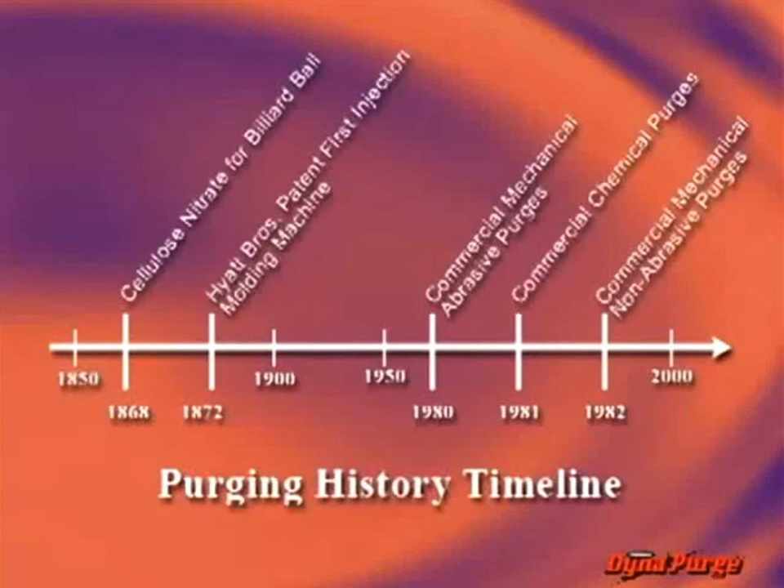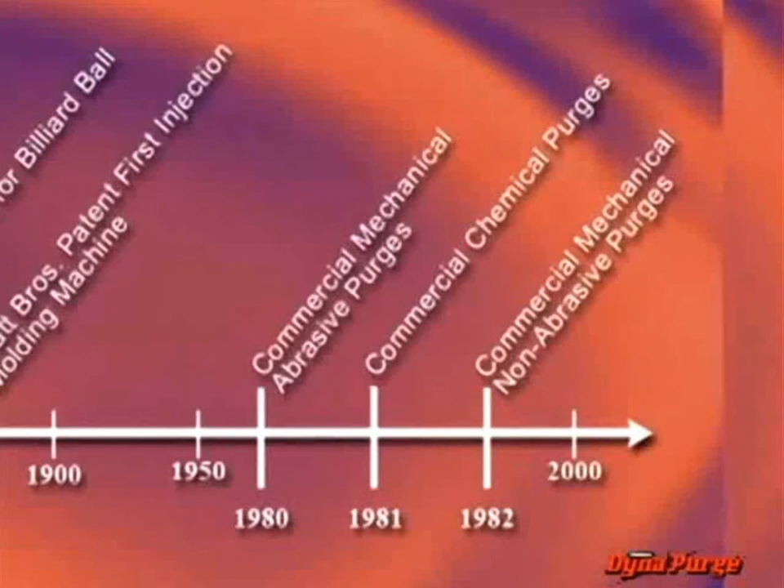Back in the early 1980s, Dyna-Purge, along with another company, pioneered the use of commercial purging products. Since then, over 100 companies have entered the market supplying mechanical, chemical, or hybrid commercial purging products.

To better understand the size and scope of the market, a few years ago, Plastics News commissioned a study asking plastic processors if they use a commercial purging product. To the surprise of many, over 80% of you responded with a yes.

When asked which factors they consider when selecting a commercial purging product, 93% said product performance, 62% said product is easy to use, and 50% said safety of using products. Rounding out the top 5 were also free samples and lowest price.

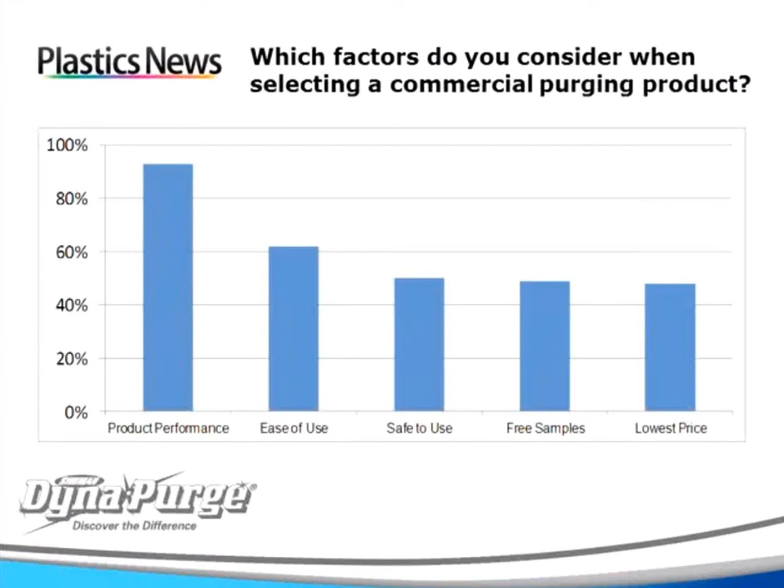More recently, in August of this year, Plastics News commissioned an independent study with Signet Research. They surveyed approximately 9,000 processors, asking them one primary question: who is your top supplier for purging products? Dyna-Purge was ranked number 1 at 56%, Asaclean was number 2 at 41%, Rapid Purge at 32%, Purgex 18%, and E/Z Purge was ranked number 5 at 17%.

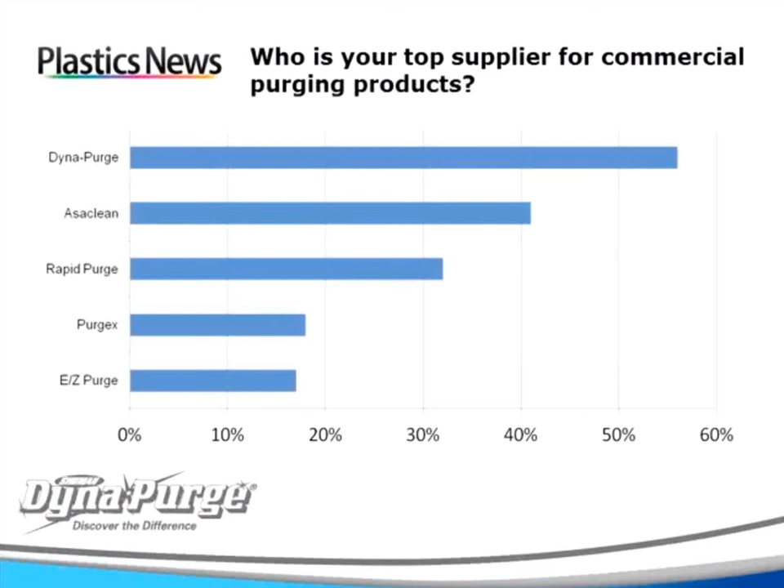As the purging market continues to evolve, so does the appetite for learning. Earlier in the year, we polled our own customers, asking them first to identify one or more of their most difficult purging-related issues, and second, to identify one or more of their current business challenges. The majority of responses led to 4 common themes and identified a clear need for more conversation on these issues.

So as a leader in the market, we decided to sponsor a 4-part webinar series under the headline, From the Boardroom to the Shop Floor: Answers to Your Top Questions. Working in collaboration with UL, we sought out the most recognized experts in their respective fields and came up with the following.

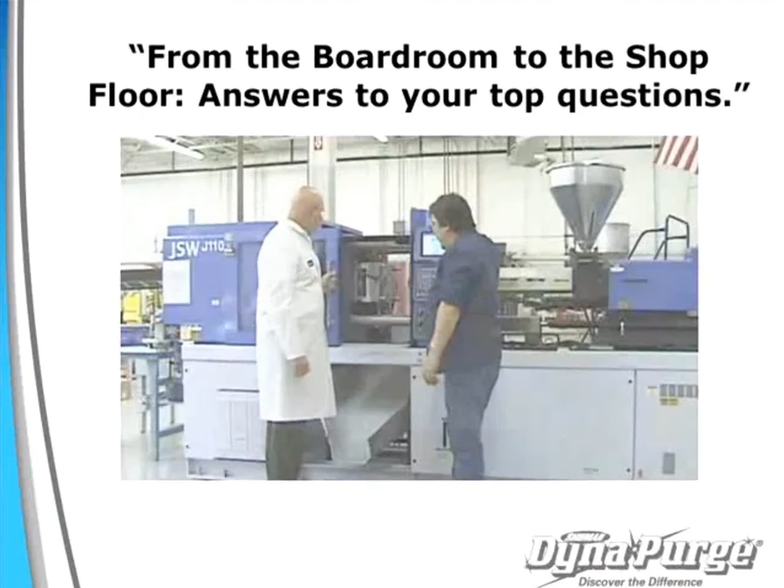The first webinar, How to Find and Keep the Right People, was co-sponsored with Plastics Today and was initially launched as a live presentation at the Plastics Midwest show back in September. The presenter, Dr. Russ Rindeau, is an expert on recruiting the very best talent. Dr. Rindeau's presentation covered all the important aspects of how to find and keep the right people. To date, his presentation has been viewed over 550 times from the UL website.

The next webinar was on the topic of training and how training can lead to sustainable changes and improvements in a plant. The presenter was Andy Routsis of Routsis Training, the premier leader in plastics training. Mr. Routsis discussed the shortage of qualified technicians in the world and why training is such an integral part of improving the bottom line. The webinar was very insightful, and as of last month, approximately 400 people have seen the presentation.

The third webinar was held just last month, and the presenter was John Bozzelli, one of the most recognized experts in injection molding. Over 500 people registered for Mr. Bozzelli's presentation. He addressed, among other things, how a poorly designed screw and barrel can be a major culprit and lead to a lot of degradation, high levels of scrap, and extensive downtime.

So here we are today, the last presentation in our 4-part series, Cleaning Up the Problem: What to Do When Experiencing Color Streaking, Degradation, and Contamination. Before we get started, please don't hesitate to submit questions during today's presentation.

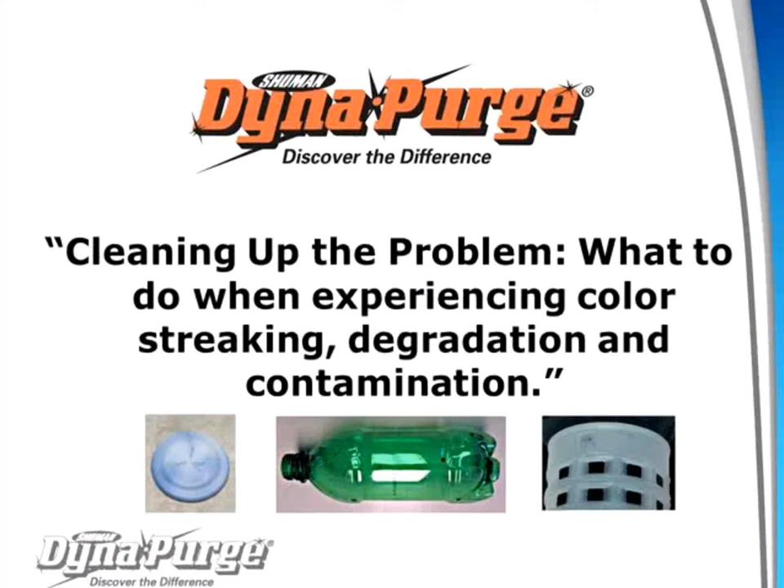While there have been other purging webinars on issues such as color changes or purging through hot runners, none have addressed what the most common problems are when purging. All too often, purge products are not used properly or in the most cost-effective manner. We hope today's webinar will provide you with some insight on what the most common problems are and, more importantly, how you can overcome them.

So let's begin by identifying what the three most common issues are. First, we will cover why selecting the right purge product is essential for a successful outcome. There are a lot of different brands and grades on the market. It is our experience that many times the wrong product is being used, or better stated, the very best product isn't being used. Today's webinar will break down why that happens.

Next, we will address how, even if you are using the best purge product, your results can still be disastrous if you aren't following the best procedure. Selecting the right procedure is just as important as selecting the right product. We will share with you why, at times, the wrong procedure is being used and how easy it is to implement the best procedure for your equipment.

Then finally, we will explore the high cost of scrap and lost production time associated with purging. Creating the proper tools for tracking and monitoring your purging program will go a long way in solving the problem. We will share with you some simple measurement tools you can use during initial trials and on an ongoing basis, that will help you achieve the desired results you need.

Okay, we already have some great questions coming in. So let's get started with the first section pertaining to the most common problems when purging and how to select the best product for your application.

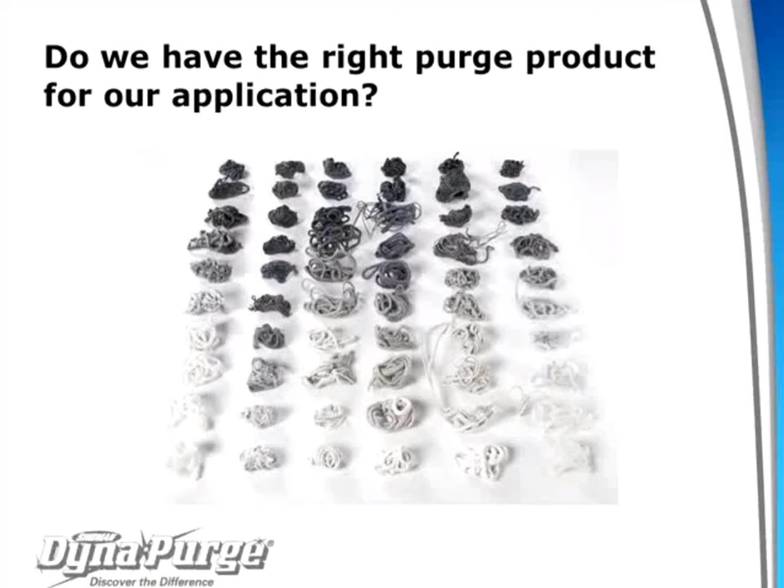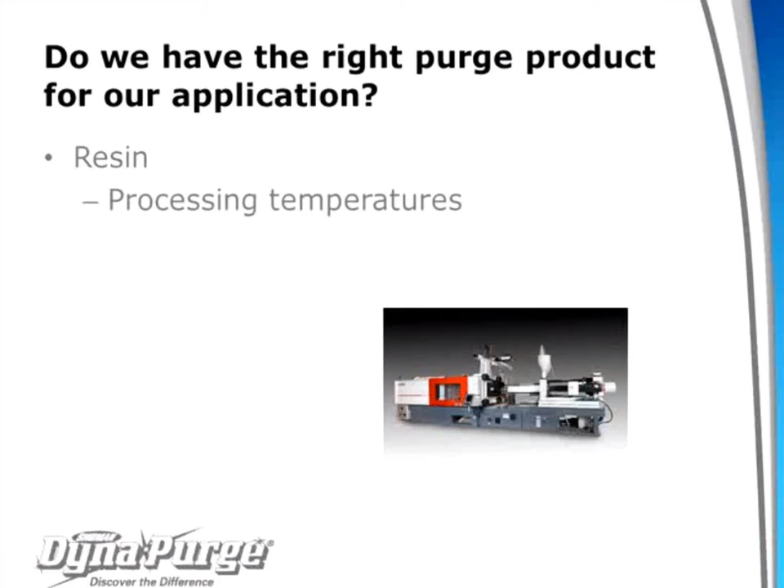In order to make a decision on which product is best for you, the first question that needs to be answered is, what resins are you running? Understanding the intrinsic properties of your production resin is very important in determining which product is best for your application. Therefore, we are going to discuss how such things as processing temperatures, thermal and moisture stability, viscosity, color, and clarity will help in understanding which purge product is right for you.

From there, we will review how additives can be a major factor in how aggressive the purge products need to be. Finally, we'll explore the type of equipment you are running, specifically the use of hot runners.

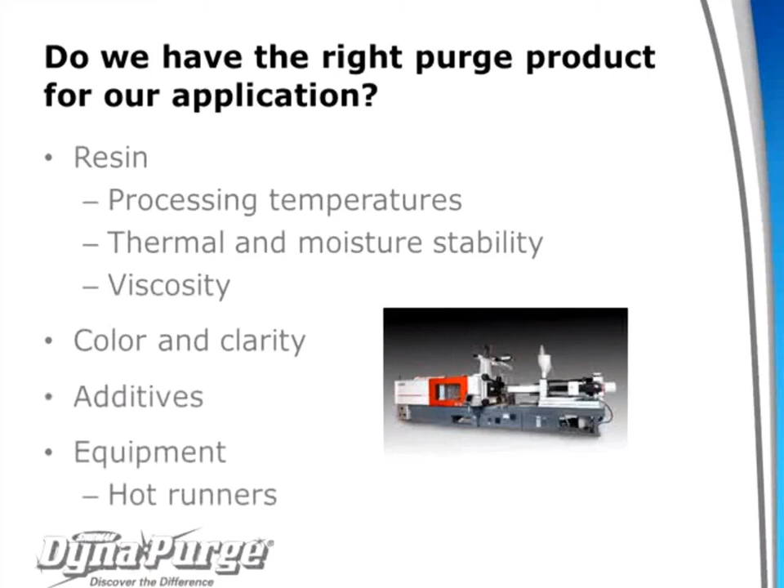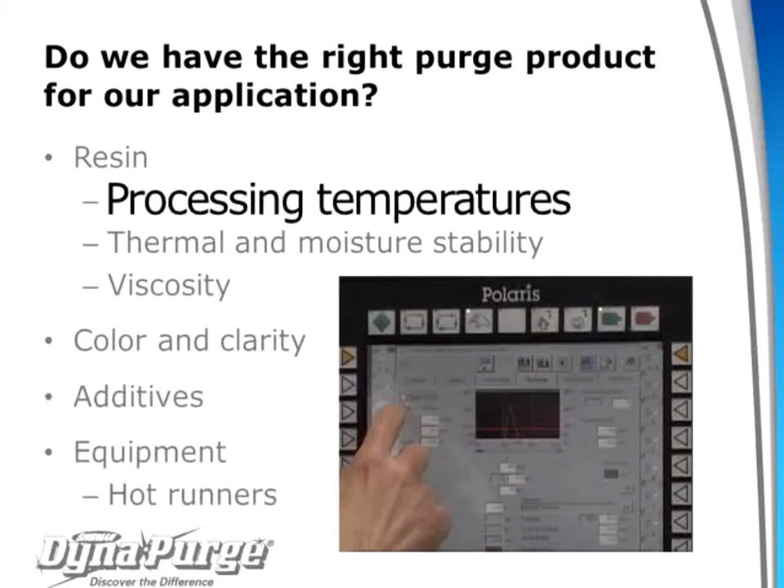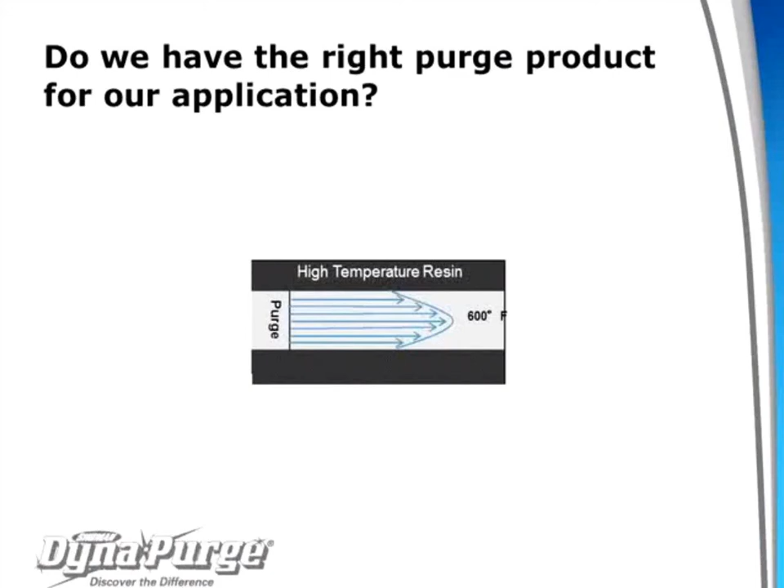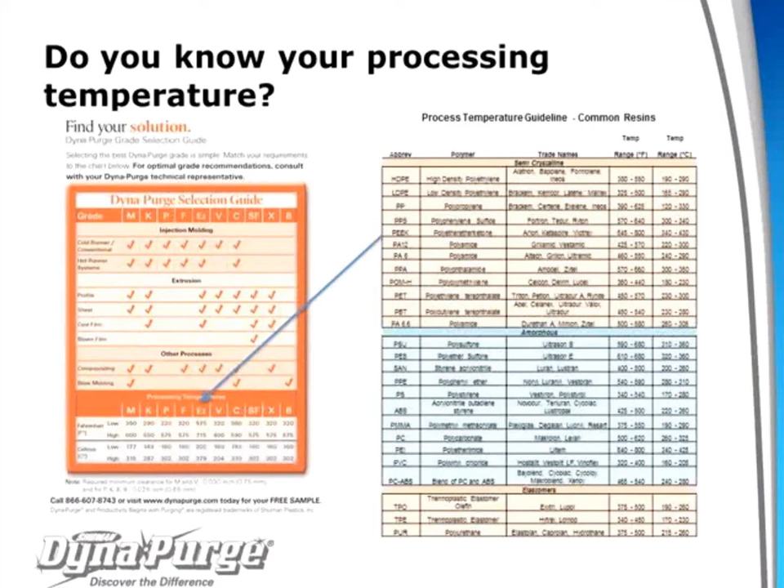As a result, the production resin remains behind on the channel surface. This leads to color streaking and degradation. Processing temperatures vary widely among resins. It is important to match the purge product to the resin's processing temperature. In some cases, such as with high temperature engineering resins, we also recommend operating at the lower end of the range to maintain a higher viscosity purge for maximum efficiency.

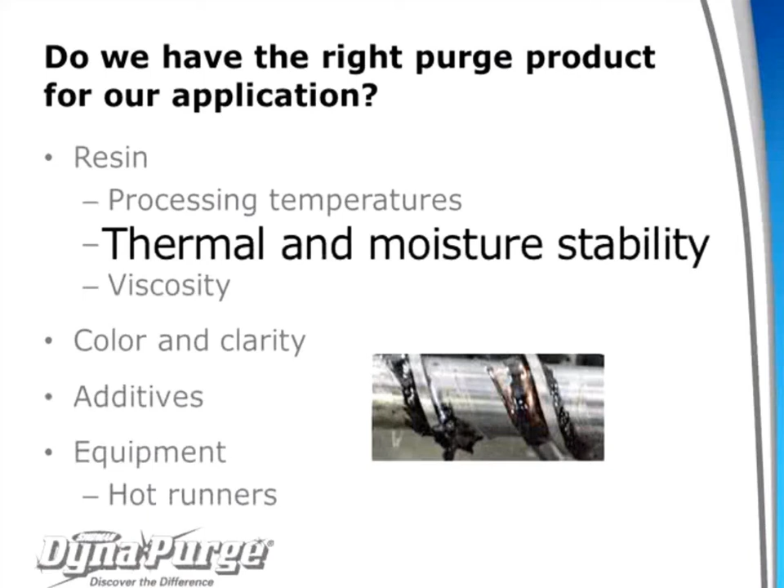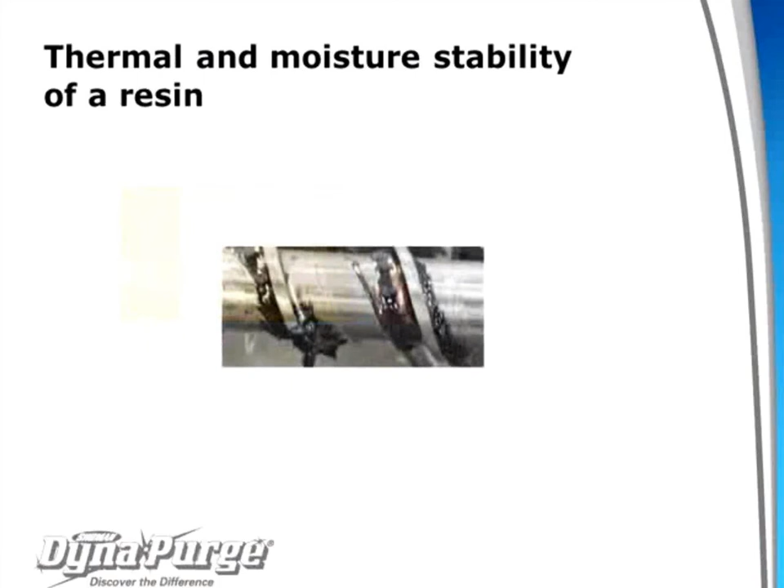Now let's discuss thermal and moisture stability of a resin. Heat and/or moisture-sensitive resins such as PVC, nylon, and polycarbonates degrade much faster and therefore may lead to carbon buildup, which can result in black specking. When experiencing black specking, a more aggressive purge product is required to scrub the carbon buildup from the surfaces of the screw and barrel.

Examples of aggressive ingredients would be fillers, such as acrylic, glass, talc, and calcium carbonate. However, some of those ingredients may be too abrasive. For example, while acrylic will soften and not damage the metal surface, glass can cause damage over time.

Also, when shutting down your machine, it is imperative to remove any unstable resins since they tend to degrade. Check with your supplier, but most have a product available for shutting down.

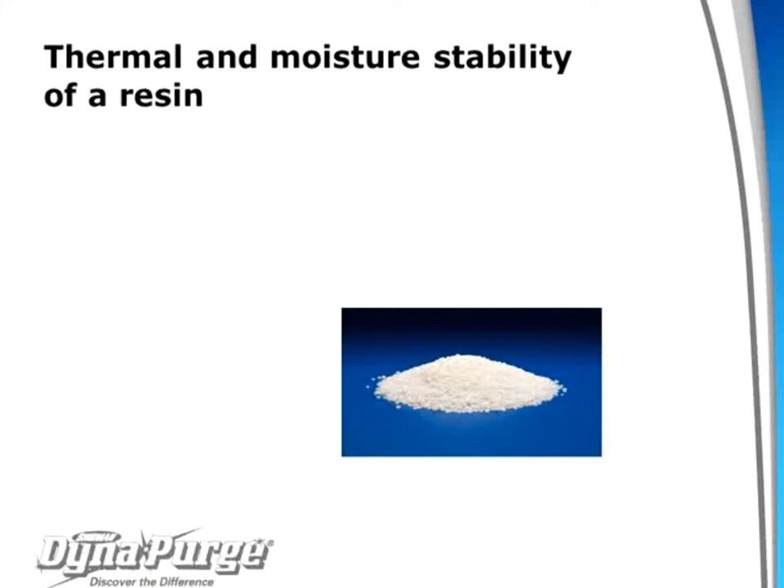Another key parameter in selecting the right purge product for your application is the viscosity of your production resin. Viscosity is a measure of a resin's resistance to flow. Melt flow indexing is the most popular way to determine the viscosity of a resin. Although not entirely accurate in predicting all flow characteristics, melt flow values can be used for rough comparisons between materials, and they are readily available from resin suppliers. A higher melt flow indicates a lower viscosity.

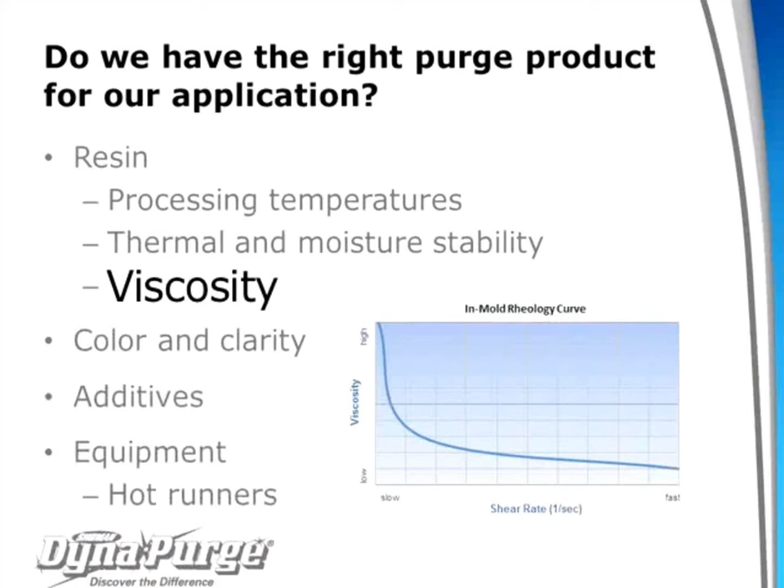Since purge products work with physical force and agitation, the melt flow of the resin will have an impact on the product's effectiveness. A low melt flow resin requires a stiffer purge product. While stiffer products work well for purging a broad range of resins, in some cases it is difficult to displace them with the next production resin. This step is referred to as post-purging.

If you are running a higher melt flow resin, a purge product with a higher melt flow should post-purge more effectively. If, however, you are running a resin with a very high melt flow, for example, for a thin wall medical part, you will likely have a problem post-purging. In a situation like this, most suppliers recommend running a blend with a natural resin to decrease the overall viscosity of the purge product.

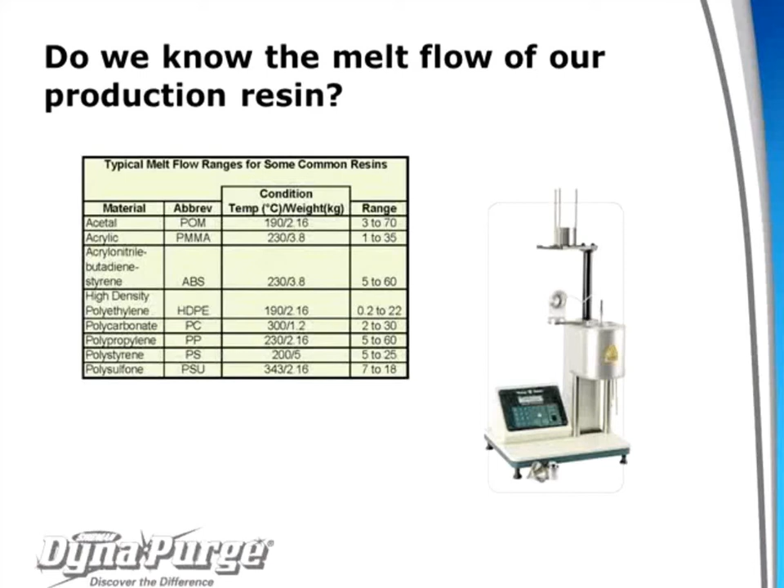Now let's talk about color and clarity. First, color is simply the number one reason for purging. The advantages of using a commercial purging product from a dark to a light color are well documented. However, as many of you have already experienced, there are some colors, even light colors, that are more problematic to purge than others. Why? Well, there are a wide variety of pigments and dyes used in the plastics industry.

In particular, liquid colorants and organic pigments are difficult to purge. Some of these additives have an affinity to metal and require a more aggressive purge for cleaning. In addition, if using color concentrate, please know that some of the carrier resins, such as EVA, will thermally degrade if left in the barrel too long.

With respect to clarity, when running parts for automotive, medical, housewares, etc., there can be no impurities. In this case, it is important to match the right purge product to the right base resin being run. For instance, an olefin-based purge product may cause cloudiness in a clear acrylic or polycarbonate part due to the incompatibility of the resins based on their chemical makeup.

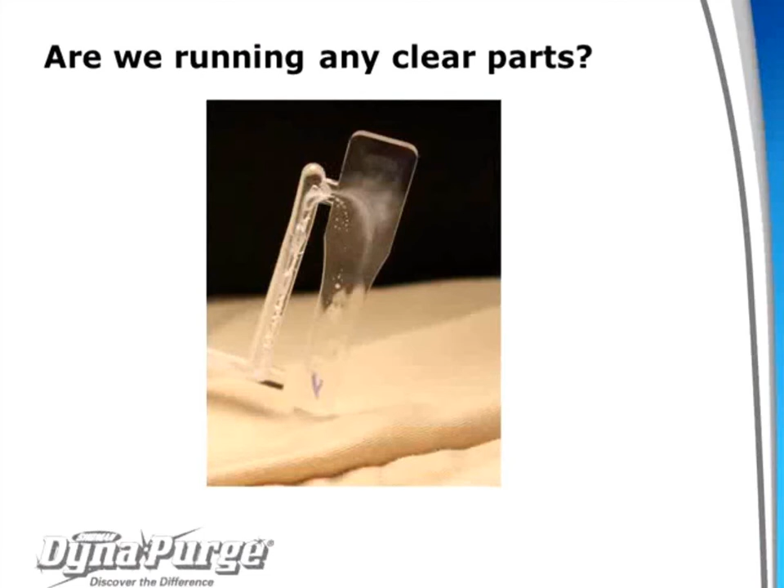Use of the right product will make the changeover much faster and create much less scrap. Check with both your resin and purge suppliers to make sure you have the right product for your application.

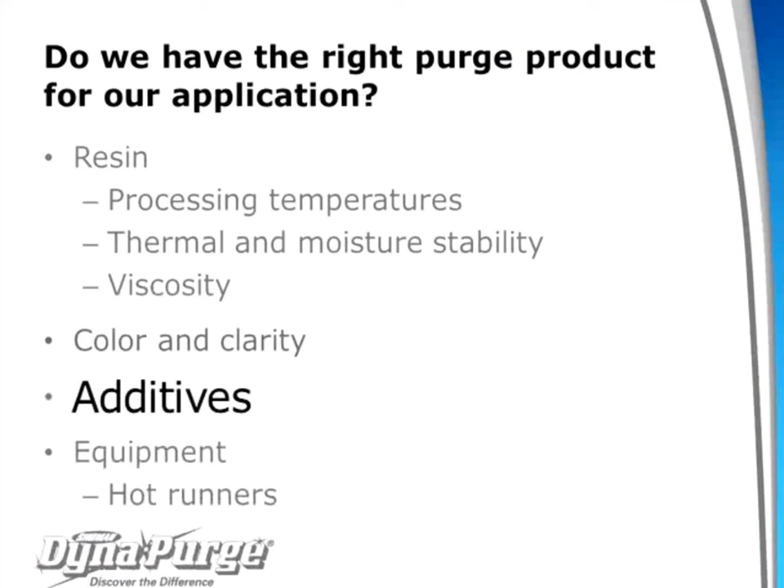There are numerous additives used in plastics today, and many of these can impact the selection of a purge product. For example, flame retardants break down endothermically when subjected to high temperatures, leaving residue behind. If your purge product is not effective in removing these additives, you may end up with carbon buildup, which becomes much more difficult to remove as time goes on. Periodic purging to get rid of buildup ultimately helps eliminate contamination and may extend the life of the screw.

More recently, fiber-reinforced plastics are gaining greater acceptance, particularly in the replacement of metal parts. These glass and carbon-filled resins are stiffer and more difficult to displace than unfilled resins. Consequently, they require a purge with a lower melt flow.

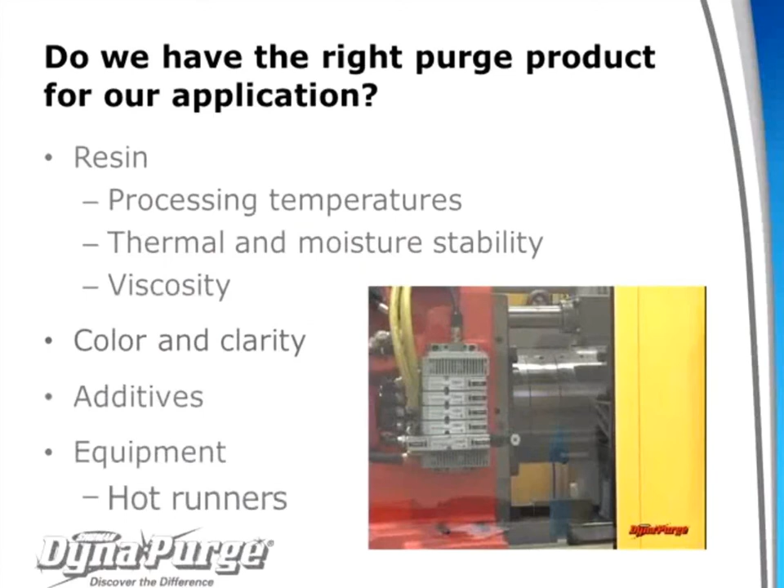When purging an injection molding machine, most of the emphasis is on the barrel and screw. However, for today's discussion, we will focus on hot runners. There are many things to consider when purging through hot runners. Many hot runners have tight clearances.

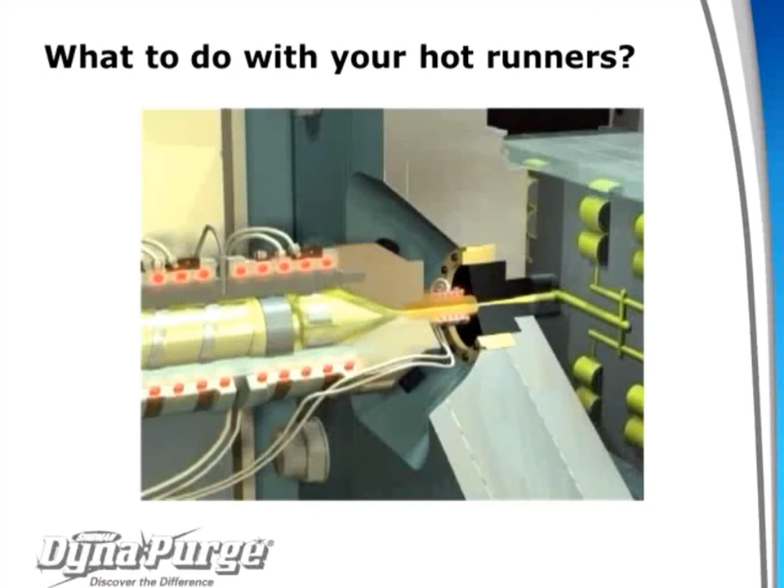Channels may be poorly designed or have uneven temperature profiles. They may be balanced or unbalanced. In such cases, it is important to use a purge product that flows evenly through the manifold, tips, and gates, and expands into the negative flow areas.

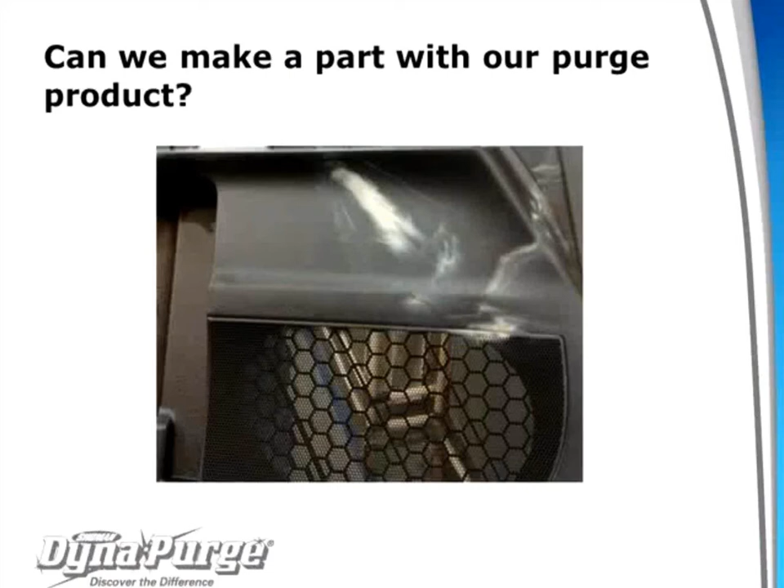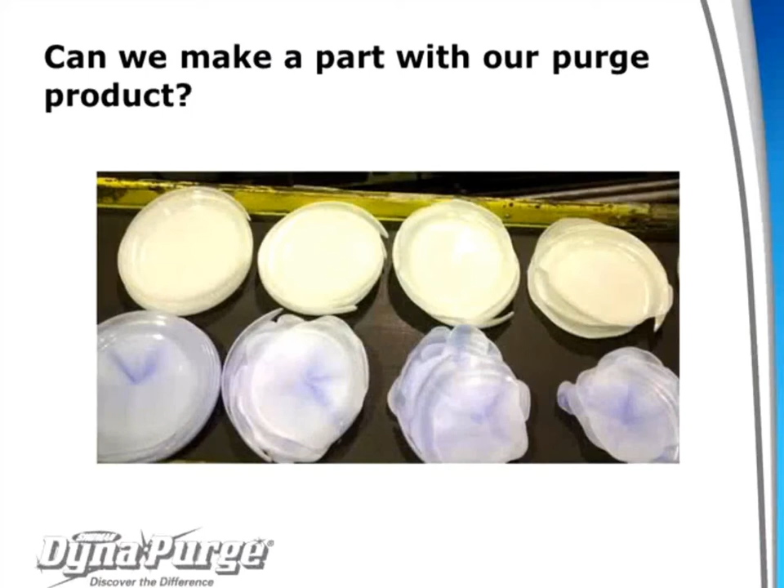Recently, there has been some discussion on whether or not you can make a part with a purge product. While this can be a much slower process than purging with the mold open, in some cases it's the only way to purge through the hot runners. While some machinery adjustments may be required, most purge products can be molded. We would encourage you to check with your supplier for additional information.

Whether purging with the mold open or making parts, there are a number of purge products on the market that are designed specifically to meet the challenges of hot runner applications. By most accounts, this is one of the fastest growing areas for purge products today.

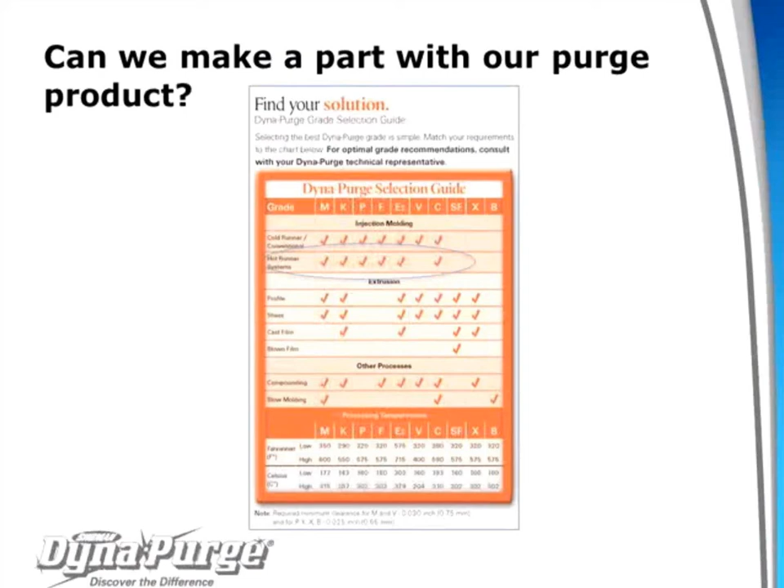Now let's move on to the importance of establishing the right purging procedure. While there have been plenty of advancements in the development of new purge products, there have been just as many improvements in how these products are used. In this section, we will review why selecting the right procedure is just as important as selecting the right product.

Over the years, we've spent a lot of time working with our customers developing new procedures to improve changeover times and reduce costs. If a processor is having a problem with their purging procedure, the answer can usually be found in one or more of the following questions.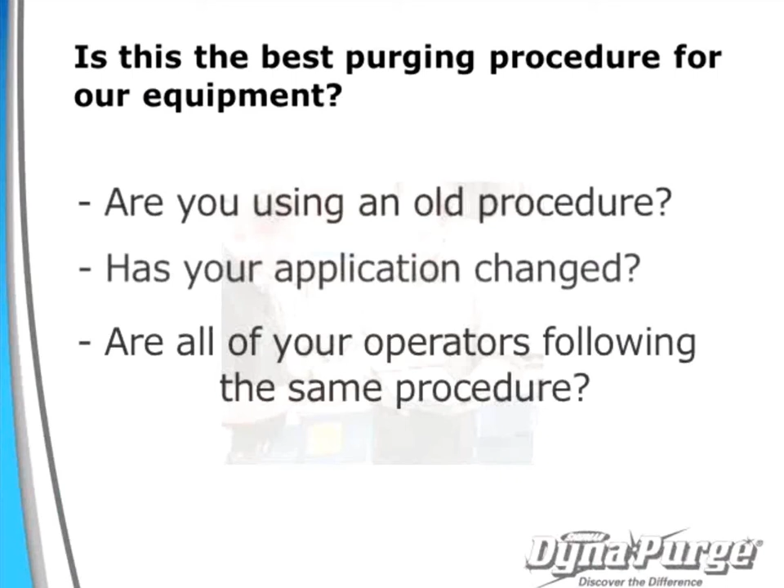1, are you using an old procedure? 2, has your application changed? 3, are all of your operators following the same procedure? Or 4, have you modified the procedure to enhance results?

Since we are all creatures of habit, too often we find ourselves following old methods and procedures. We would encourage you to check with your purge supplier to make sure you have the latest and greatest procedure. Every major supplier periodically updates their procedures as part of a continuous improvement program.

A case in point, we worked with a Tier 1 company implementing our quick color change procedure for transitioning from a dark to a light color. The old procedure was to finish the run, back off the barrel, and then starve the machine of the resident resin. From there, you would introduce the purge and continue to purge until the equipment was clean and free of contamination. The procedure would then address purging through the hot runners.

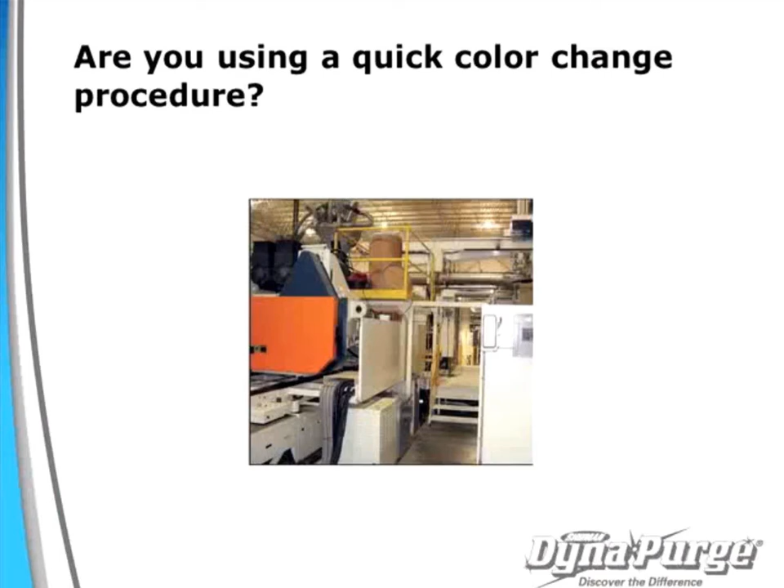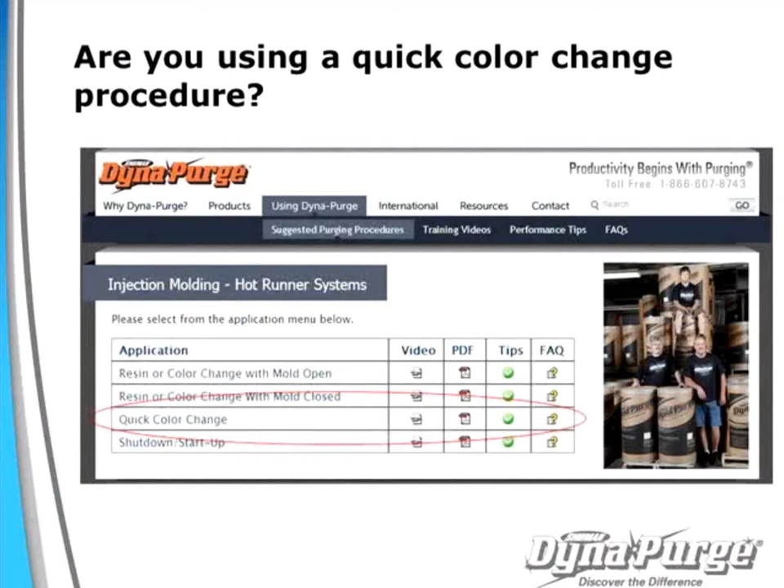However, this 12-step procedure was too time-consuming for this Tier 1 company. We then introduced the quick color change procedure, which is a continuous process and eliminates starving the screw of the resident resin. In this particular situation, our customer saved over 30 pounds of good material by no longer starving the screw. In addition, by utilizing Dyna-Purge more efficiently, they used approximately 30% less purge. In the end, this new procedure entailed only 6 steps, saving our customer material, time, and a lot of money.

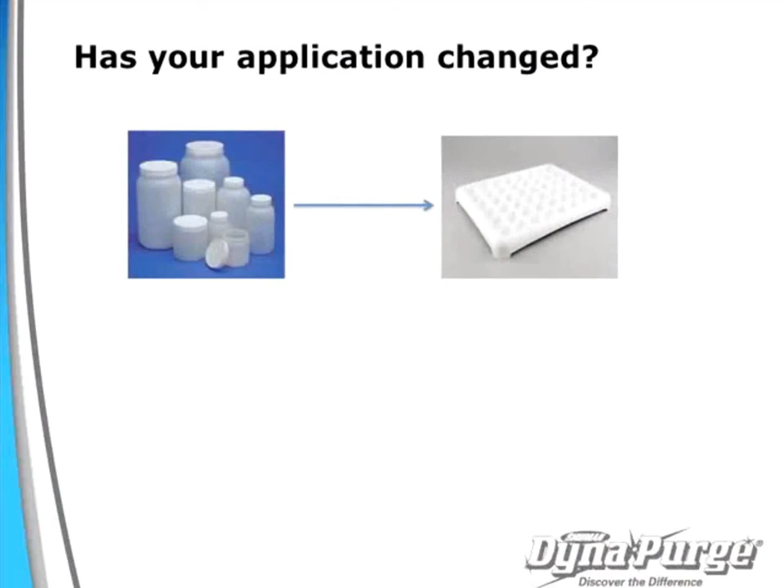A procedure that works well for one application may not work well for another. There are many examples of this. Recently, we were approached by a custom molder who was having a problem with a new job they were running. They had been running an HDPE job making food containers. They picked up a new job running PVC appliance panels and decided to run it on the same press. They began to experience black specking on Monday morning after weekend shutdown and ended up with a lot of scrap.

We introduced them to a new shutdown startup procedure that prevented PVC degradation and eliminated the black specks. In the shutdown startup procedure, the PVC was purged from the machine and replaced with a thermally stable purge product. In addition to purging, this grade also shrinks while cooling, pulling the remaining contamination from the metal surfaces of the screw and barrel.

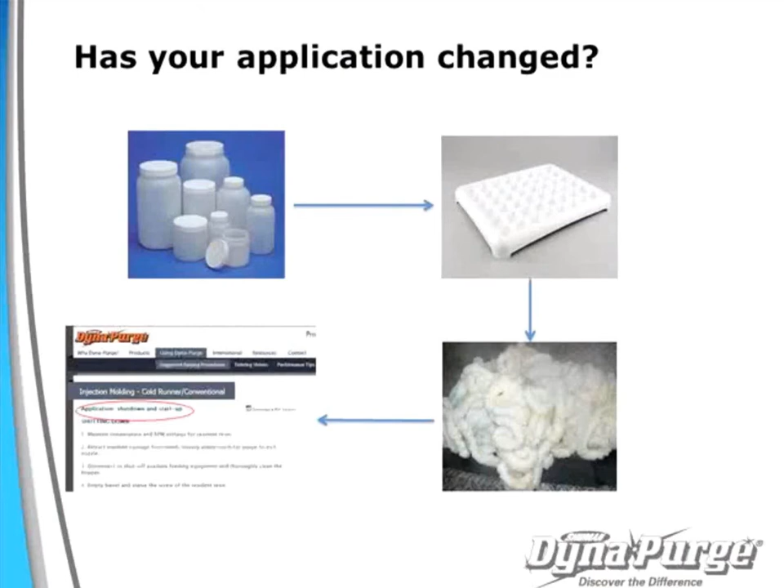It is quite common for different operators to use different procedures based on their previous experience. Variations among shifts can be quite significant. Some operators have developed best practices, while others might be following old, outdated procedures. Whatever purging procedure your company decides to implement per machine, tool, etc., it should be the same procedure for all operators. The best way to promote adoption of standardized procedures among operators is to implement a training program.

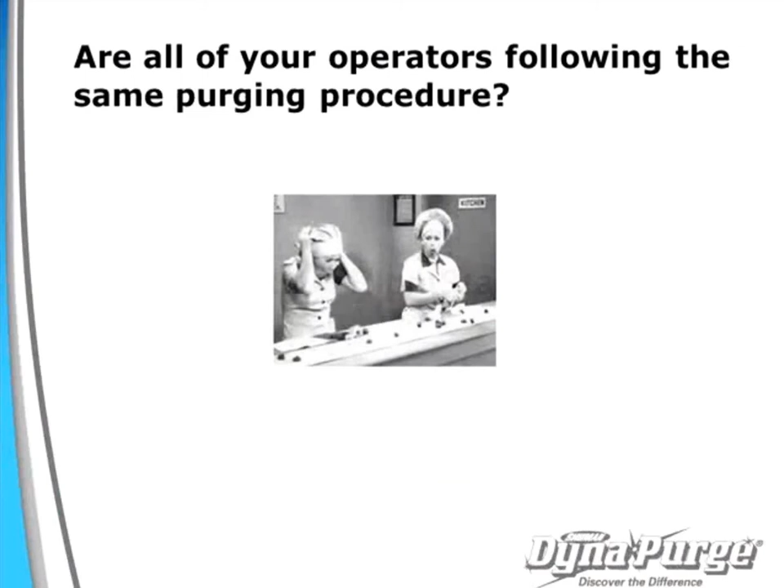A successful training program should be customized for your plant. There are many excellent consultants who can help you customize a training program for your company. One such training solution called Right Start was discussed in the second webinar with Andy Woutsis.

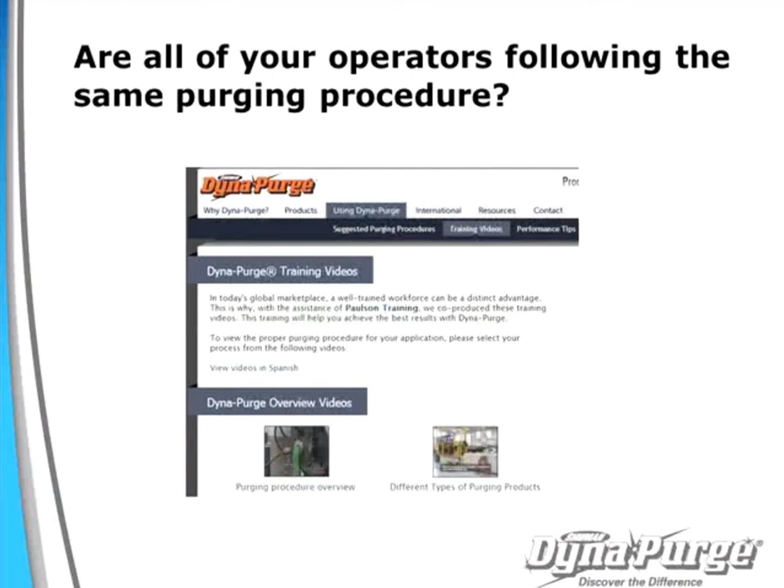We at Dyna-Purge have also been involved in establishing specific training programs for purging. One such example was a Tier 1 automotive customer that wanted us to establish a training program on purging for their new hires. In addition to creating a customized training manual, we also gave them access to our website, where we have training videos in both English and Spanish for every procedure.

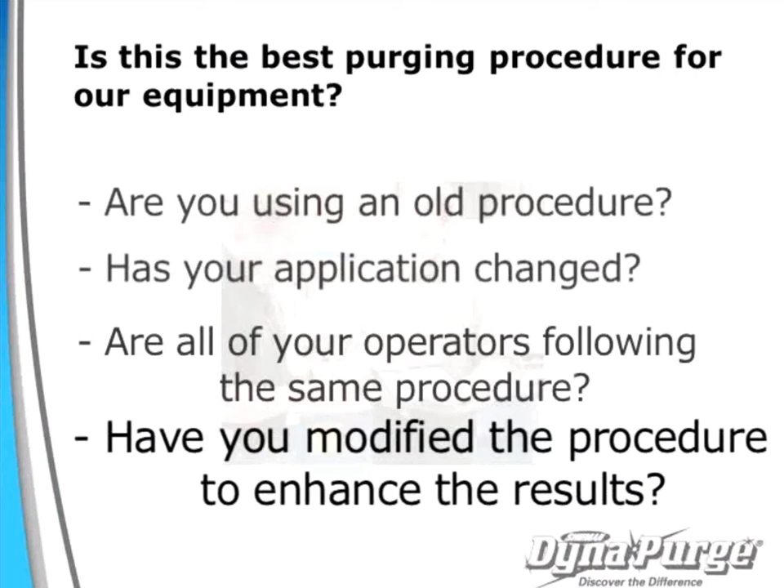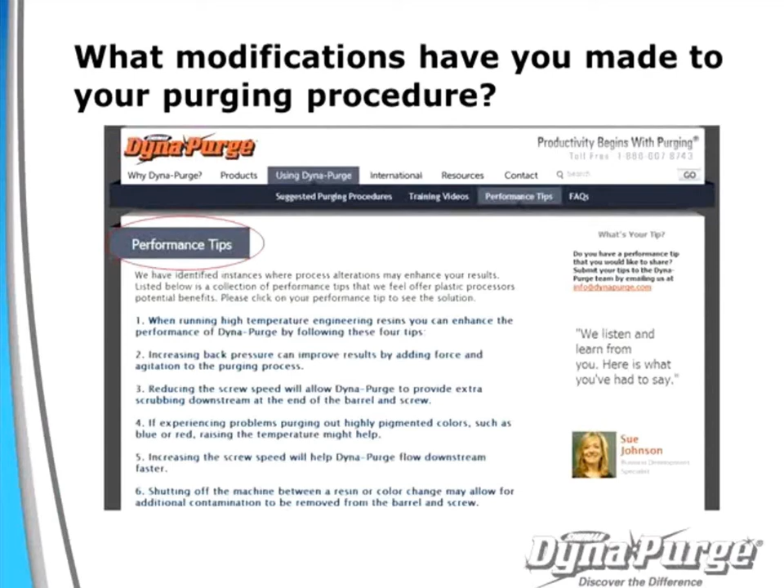While every purging supplier has spent a lot of time perfecting their recommended purging procedures, the truth is there are times when modifying them will improve the results. That is why suppliers like Dyna-Purge have created a performance tips section on their website. There are so many variables to take into consideration when establishing a procedure. While in most situations a standard procedure will work well, at times modifying it may enhance the results.

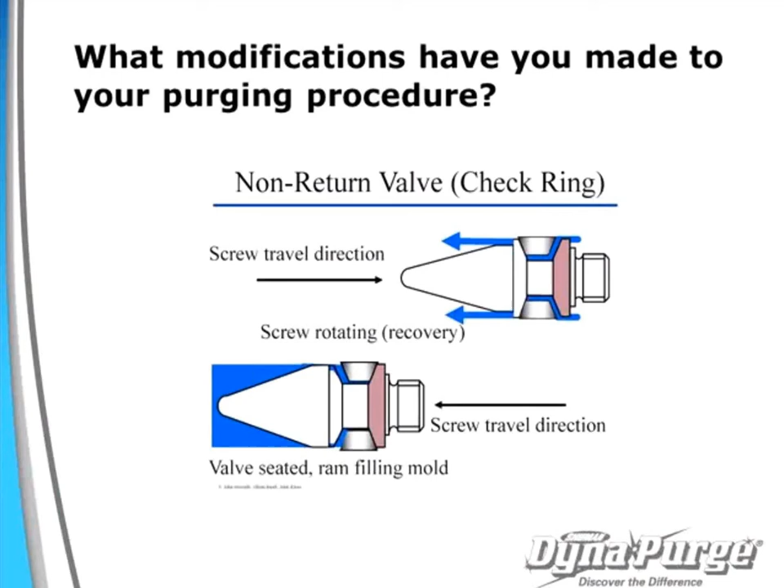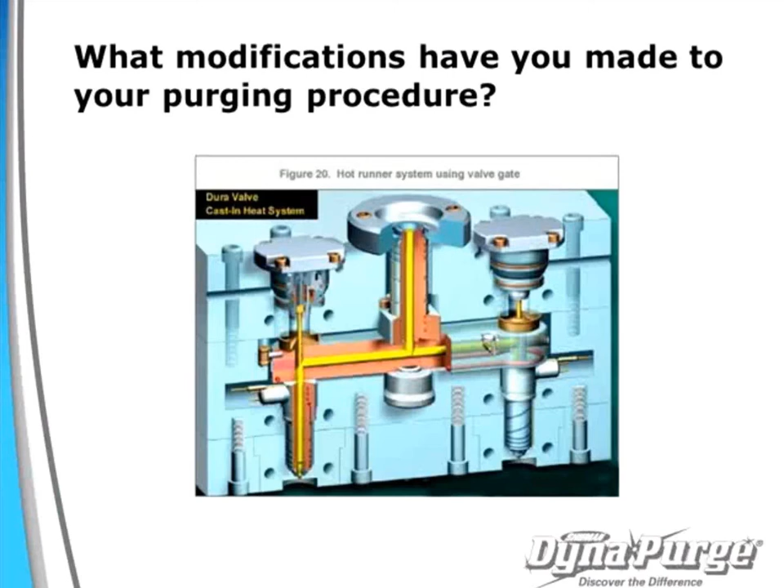As examples, one machine may have a problem with material getting hung up in the check ring. In this case, more high-velocity short shots will loosen the contamination, whereas another improvement may be associated with purging through valve-gated systems. If some channels are more problematic due to poor design or wear, you may have to close off certain gates and redirect more purging material to the difficult channels. The point is, once you validate these modifications and best practices, make sure they become part of the new procedure.

Okay, now that we have covered selecting the right product and using the best procedure for your equipment, we have arrived at the last section. Are we properly measuring and tracking the results from purging?

In order to properly measure and track purging, you need to know what the real costs are. Every purging supplier has on their website a cost to purge calculator.

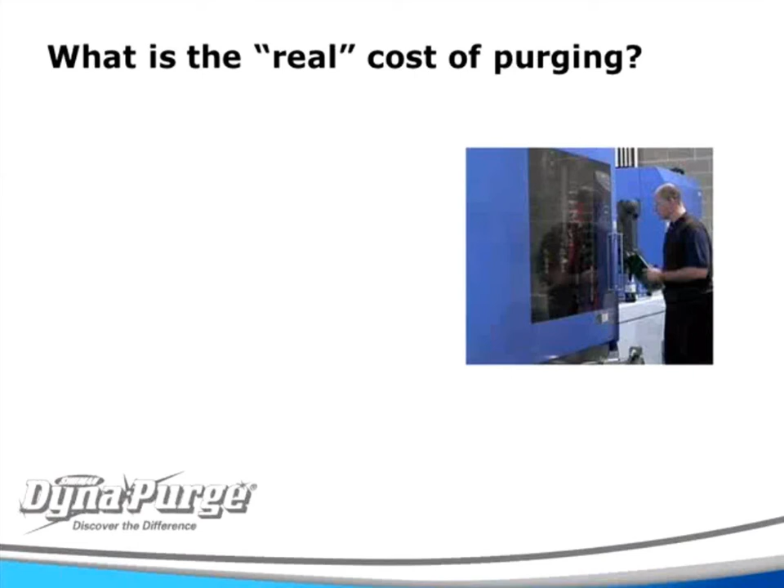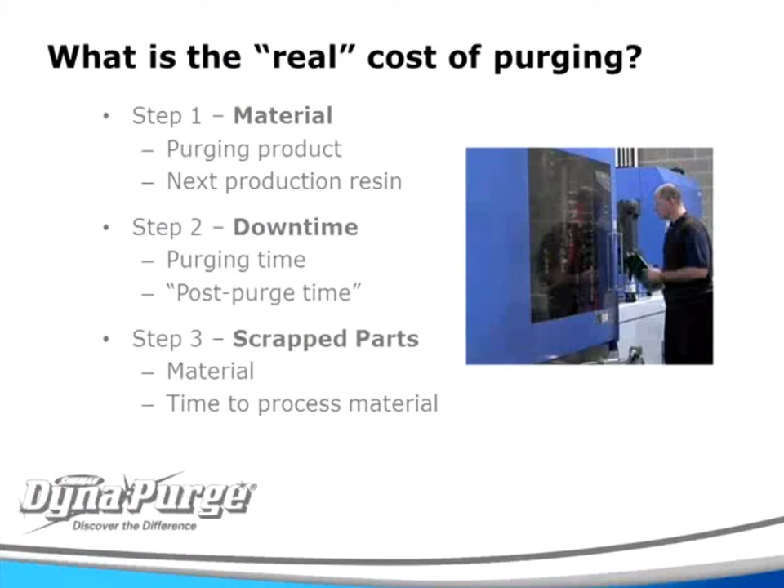Regardless of whose cost calculator you use, there are three basic components that define the real cost of purging. They are material—this is both the production resin and purging material. Downtime—this is everything from purging time, including soaking if you are using a chemical product, to the amount of time it takes to post-purge. And scrapped parts—this is the number of bad parts made after purging and before a good part is made, capturing both time and material. We refer to ours as a savings calculator.

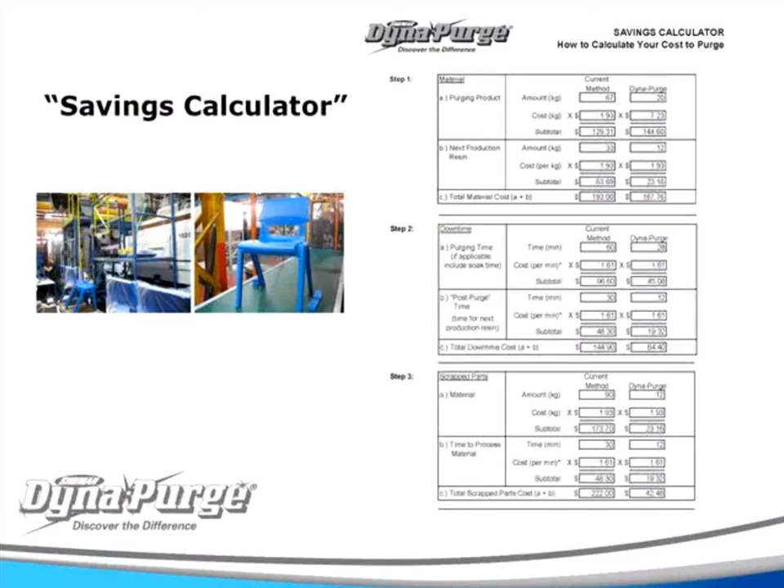Here's an actual example recently completed by a large producer of polypropylene chairs. The changeover was from blue to natural, one of their more difficult transitions. It normally took 2 hours to complete the changeover using 190 kilograms of natural resin. With Dyna-Purge, the changeover took only 52 minutes and only 44 kilograms of material is needed.

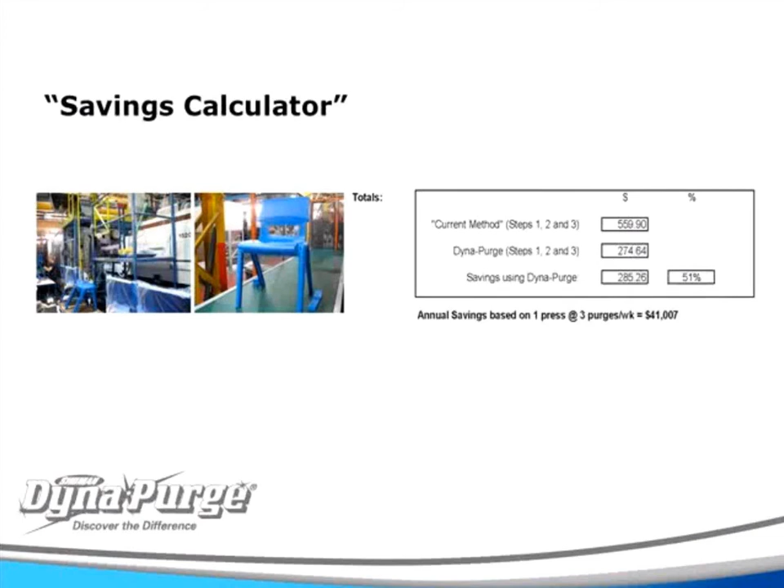A savings of $285 per purge was realized. This translated to over $41,000 in savings annually for just the one press, and demonstrates the value of measuring and tracking your process in order to make the best decisions about purging.

Although some of you might find this a little surprising, purging is usually an emotional experience. The degree of subjectivity when running purging trials can be quite significant, even among different operators within a given plant. The importance of properly measuring your purging results from the outset takes on extra meaning when you understand this.

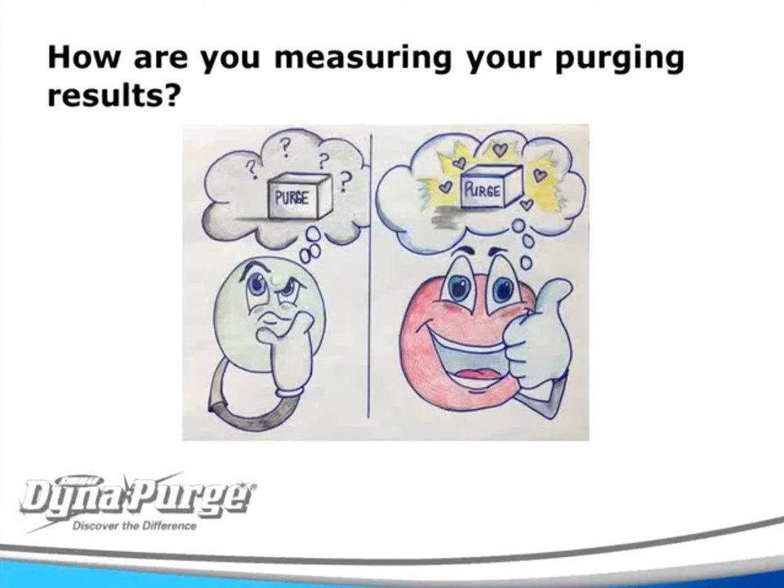The more science applied to managing your purging program, especially during the trialing stage, the better off you will be in the long run. It is fascinating to see the different means used for introducing a purging product into a machine.

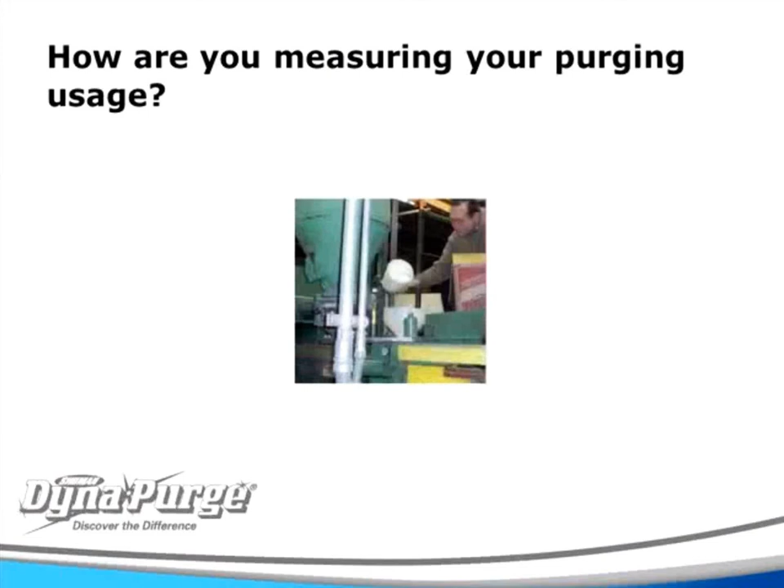While the most common methods would be a scoop, bucket, or vacuum drawn, we have seen everything, including the use of coffee cups. For some companies, this is not a big issue, but for others, there can be a significant cost for not properly measuring purging consumption.

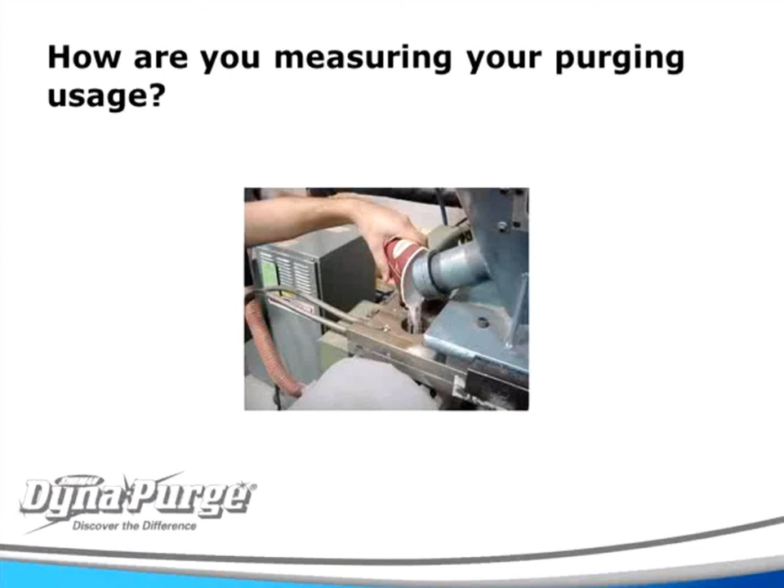How does your company measure usage? Once you have established a real cost to purge and a good method for measuring usage, how are you going to track the results? Control charts are one of the most commonly used methods of monitoring the stability of a process.

They visually display the fluctuations of a particular variable, such as scrap, in a way that lets you easily determine whether these variations fall within the process limits. They let you know if you are continually improving or if you're having a problem.

One thing that concerns us is when we see a customer is using too much purge product. That is when we worry that a purging process might be out of control and we would like to step in to help. For instance, on this chart, you can see when the heater bands broke. You can also see the downward trend in scrap when a new purge procedure was implemented.

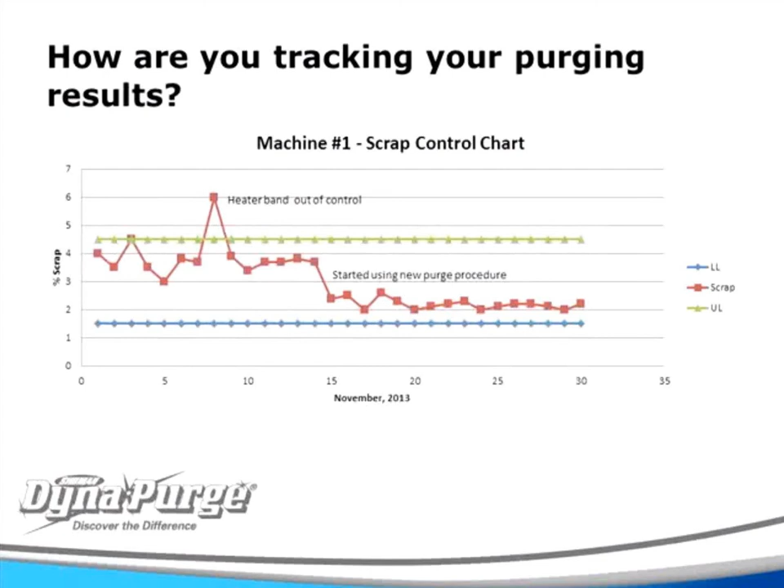So let's leave you with some thoughts to consider. If you are dealing with color streaking, contamination, and degradation, our message to you is to stop purging and start planning. It is imperative that your plan addresses the three key components, which are selecting the right purging product, implementing the best procedure, and measuring and tracking results. In the first section, we reviewed how to determine if you have the best product for your application.

There are a variety of purging products offered in today's marketplace, ranging from general purpose to specialty grades. Selecting the correct grade is the first step in assuring a positive outcome. Next, make sure you are using the very best procedure for your purge product. Even if you are an existing user, you might not be following the most cost-effective procedure for your application.

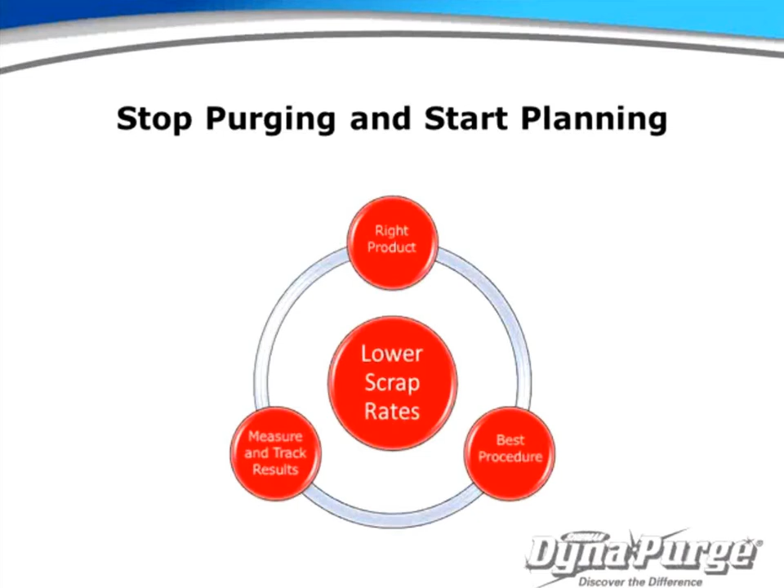In the third section, we discussed how to measure and track your purging results. As covered in today's webinar, there are some simple steps you can take to measure and track performance. With proper tracking documentation, it is much easier to show the benefits of using a purge product.